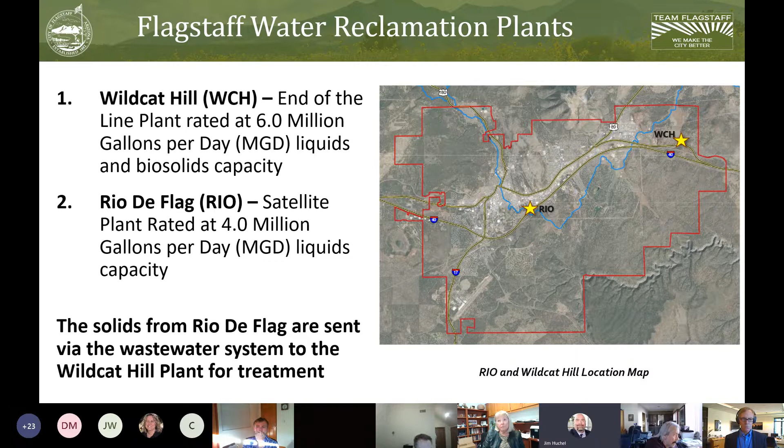And then Rio de Flag is a satellite plant. It's rated for 4 million gallons per day, and we're putting through right around 2 million gallons today. The important thing to remember from this slide is that the solids from Rio de Flag are sent out to the Wildcat Reclamation Plant for treatment. So since 2010, we've been working on all sorts of energy efficiency projects between the solar fields, VFDs, variable frequency drives, and motors.

We're going to give you a little bit of history. So Wildcat Hill was constructed back in 1971. It was constructed at 3 MGD, or 3 million gallons per day. It produced a Class B reclaimed water that was delivered to Continental Country Club. Biosolids started to be disposed on site. In 1981, they expanded the facility to 6 MGD. There have been no expansions since 1981, so we're still rated at that 6 MGD.

In 1993, they constructed the Rio de Flag Water Reclamation Plant. And again, it came in as a 4 MGD facility, currently running at 2, but it put out a Class A reclaimed water. And the difference is the amount of nitrogen that we take out of the water, basically just for the reclaim purposes. In 2009, Wildcat Hill was upgraded to a Class A reclaimed water plant. Again, no capacity increase, just increased the treatment capabilities of it to a Class A.

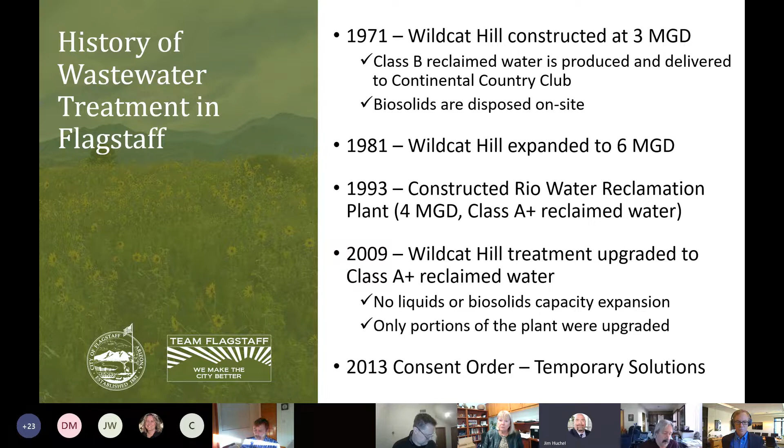There were no liquids or biosolids capacity expansions, and only portions of that plant were upgraded. And again, we're going to talk about some of those things that weren't upgraded. In 2013, there was a consent order, and we put in a bunch of temporary solutions. The temporary solutions were supposed to be good for 5 years. They're still being used today. So it's almost 10 years later, 9 to be exact, that we're still using some of these temporary solutions.

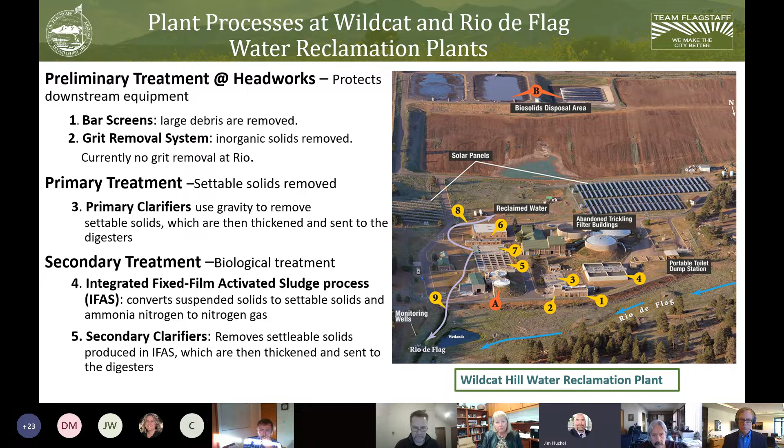The next stage is called the tertiary step, and those are the sand filters. That's down here in this number 6 area. We run through the sand filters or disc filters. Again, we're taking out particulate matter that is larger than 10 microns.

From there, we go over to disinfection. The big difference between Wildcat and Rio is Wildcat uses chlorine, where Rio uses ultraviolet disinfection. And again, what we're doing is just trying to make the water safe before we put it out. From there, the fully treated water goes into either the reclaimed water distribution system or purple pipe, or it's discharged into the Rio de Flag drainage.

We have 2 anaerobic digesters down here marked by the A, and that's where all the solids go. So we keep those solids in there for about 15 days. It digests the solids, just like in your body, you digest the food. We break down those foods into their most common particulates, which is carbon, which is the biosolids. We release the water. We also get a byproduct of methane gas from doing this process.

From here, the digested solids are either sent up to the 2 ponds. We call these sludge storage basins, or over here to the geobags. The geobags were one of those temporary things that were put in about 9 years ago as a temporary solution for the ponds.

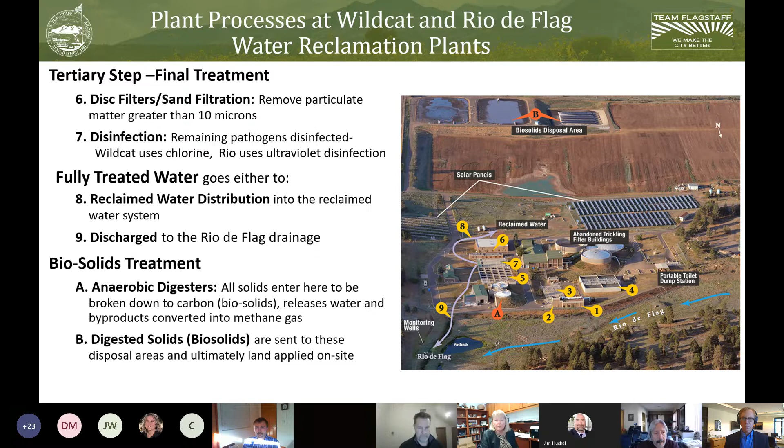And what all this does for us is redundancy, because we have multiple points, especially at Wildcat, for single points of failure or a potential failure. And it limits our operation and mechanical flexibility, meaning that we can't take things offline in order to fix them because we don't have a spare one to put online. As you saw, that one IFAS basin is the only treatment process out at Wildcat. So if it goes down, then the treatment process out there will not work.

So what we're asking for the money for is for rehabilitation and replacement. Over the past 10 years or so, we've had budget constraints and the lack of redundancy to make the repairs. And why all this is important is because during peak flow events, during monsoon seasons, we can see 3 times the daily flows. So our current flows are right around 3.5 at Wildcat.

And so during monsoon rains, we can see those flows go up to 10 to 15 million gallons per day, which makes it really hard for us to do treatment because we need that detention time, the lag time in the plant, and actually to treat the solids.

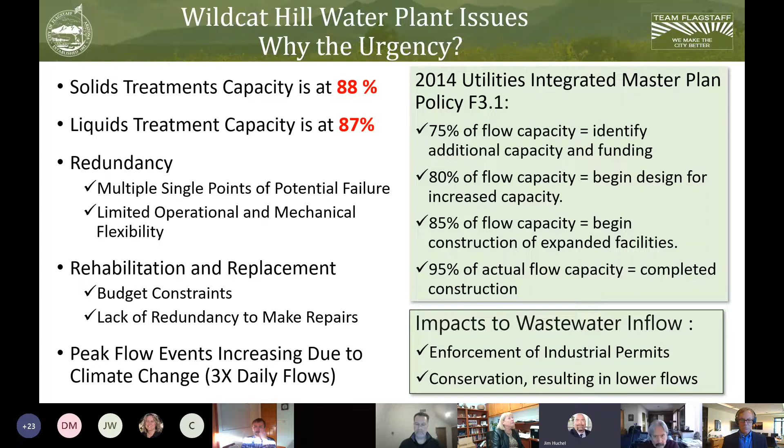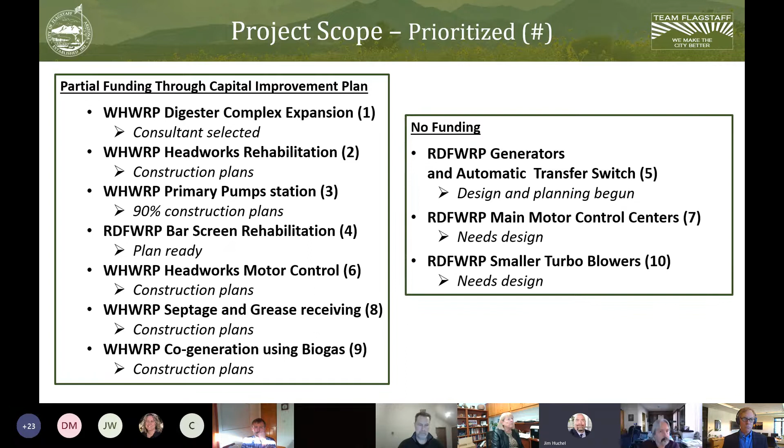So now we're back into the projects. This time we prioritized them for you so that you could see which ones were high on our list. And we're going to go through them in order so that we keep on track. So the first one is for the digester complex expansion. It's our priority number one. They were installed in 1983, and the mixing system was upgraded in 2008. The solids treatment capacity at the digesters is 88%.

We're really high on those, and we have to have that minimum of 15 days in the digesters, or else we will not be able to make Class B biosolids. If we can't make Class B biosolids, then we have to take it out to a landfill. So that's why this is so critical for our operation. And it's part of a three-part plan.

The first part is to build the digesters. The second part is to put in a unit to dewater. And then there's a third portion, which is going to be solar drying. So we're going to be very energy efficient on that one, where we can dry the solids and still apply them to the field. But it also gives us the opportunity to use it for biochar or use it for top cover out at the landfill.

Oops, sorry. And the project is estimated at about 16 million. The annual inflation rate is 20%. We kind of talked about that last week, where I've talked to some of my colleagues in both consulting and vendors, and they're seeing a 20% increase on all projects currently. And the risk for this one is very high. If we don't get this done, then we won't be able to treat the solids at the plant, which is going to cost us more money in the long run.

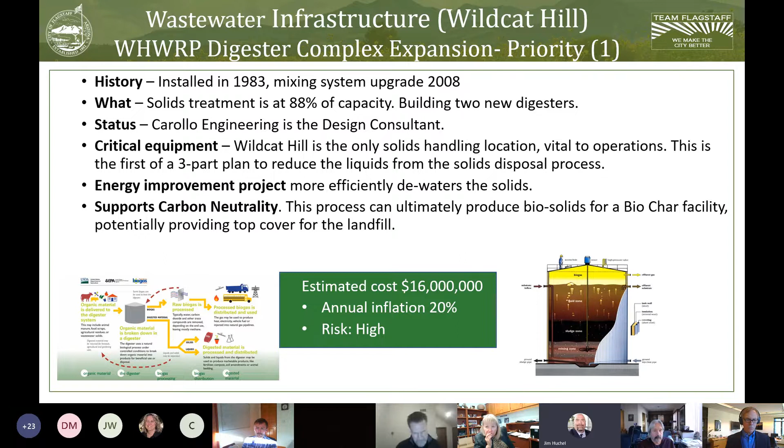The second project is the Headworks Rehabilitation. Again, Headworks was constructed in 1983. And whenever we put that in, we put in 3 bar screens. In 2012, we replaced 2 of the bar screens, but we didn't replace the third one. We're also going to install some flow metering for inflow monitoring. Currently, the flow metering system that's there was put in a manhole, and it's a temporary thing, and we're having a whole lot of problems trying to get a consistent flow.

And that's really important for us to know how much flow is coming in, because that's how we do our process control. Think about it as like your speedometer on your car. If it's not working, it's kind of difficult to tell how fast you're going down the highway. We're also going to put in a bypass around this building while we're doing the work in the building, which ties into the primary effluent pump station project, which we're going to do next. And what it does is it allows us to do both of those projects and be as efficient as we possibly can. So this will improve plant operations.

Currently, that third bar screen is offline. It doesn't work anymore. Again, it's almost 30 years old. It has lived its life. This also creates resiliency in the plants to help treat higher flows, get more accurate flow measurements. And the estimated cost for this project is right around $5 million. And again, that annual inflation is never going to change. It's always going to be 20%, but the risk is very high.

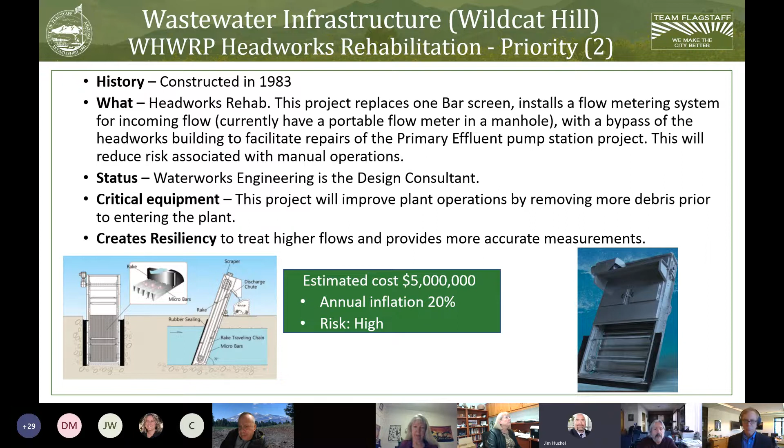So this is the primary effluent pump station. It's our priority number 3, and it has to be done after we do that other project. And what we did here is we gave you a schematic. You can see at the bottom down here, we have 2 smaller pumps. Whenever they upgraded the plant back in 2008, they did not do anything with the existing pump station. So our pump curve is very inefficient.

The pumps either have to pump too hard or not hard enough, and they're cycling on and off, which causes problems in the plant. This project puts in 2 smaller pumps for normal flows, and then these 4 larger pumps for larger flows. These 2 smaller pumps can also be increased in size in the future whenever the flows deem that to upgrade them to a higher flow.

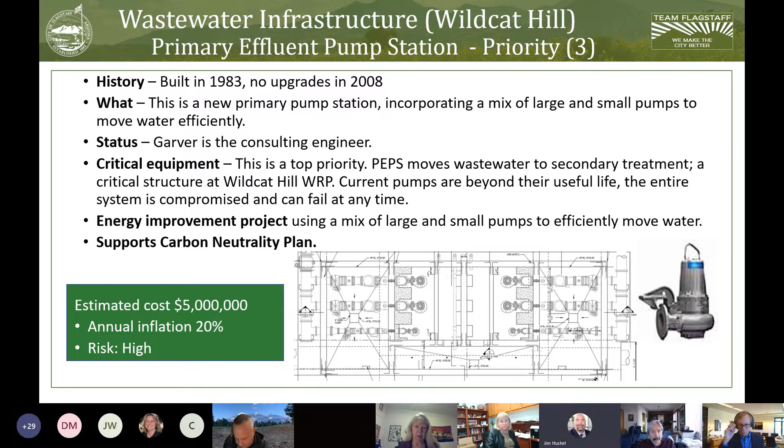This project is right around $5 million, and it's a high priority because during high flow events, the current pumping station runs all 4 pumps. If one of those pumps happens to fail, the flow will start to back up into the plant, and it can flood our tunnels and come up around the plant. This project also supports our carbon neutrality plan because these pumps will be much more efficient.

Our next project is at the Rio de Flag. It's a bar screen project, just like over at Wildcat, except these bar screens have been maintained very well over the last 30 years. We had the manufacturer come out right before COVID and inspect them, and they said that if we can get in there and make some improvements, we don't have to pull these bar screens all the way out of the system and put in new ones, which is a big cost savings for us. This is critical because we're planning on increasing the flows to the Rio facility, and for that, we have to have both of these bar screens online. So this supports our resiliency and redundancy initiatives.

This project is $1.5 million, and the risk is very high because, again, they're 30 years old. They're at the end of their useful life until we can get them fixed.

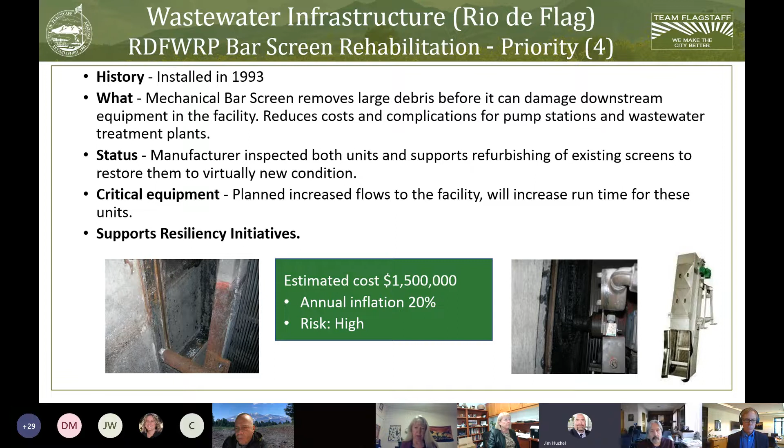The next project, again, is over here at the Rio de Flag. It's our priority 5 — the generators and switch gears. The reason for having those here is as we start to increase flow to Rio, the Wildcat plant will see a reduction in flow. And if, for whatever reason, we had a power failure and all the flow suddenly got sent out to Wildcat, Wildcat can't handle it. I kind of compare it to driving the Titanic — we can see the iceberg coming, but we just can't turn. So it's really important to have these new generators and switch gears in place before something bad happens.

We talked about this a little bit last time — we've lost power at the Rio before for 6 or 7 hours. If we go much longer than that, our bugs will start to die, and then it takes us 3 to 6 weeks to bring that plant back online. During that time, we have to send all that flow out to Wildcat, and it puts a big burden on them. The facility uses oxygen produced by compressors, which have to run off electricity, and the whole plant runs off electricity. If we don't have power, I can't even pump the water into the plant. So again, this supports our resiliency.

As we think about this — I was working at a plant 10 or 15 years ago, and they built a brand new plant for $33 million. They did not put in generators. 2 weeks after they put it online, the power failed, and the next day the engineers were out trying to figure out how to put in generators. The estimated cost for this project is $2.16 million. But the risk is a little bit more on the medium side, not the high side, because power failures are rare, but they do happen.

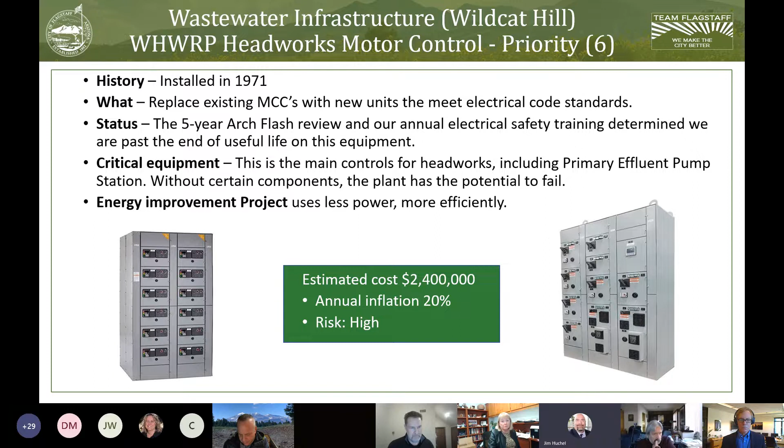So the next one is, again, a motor control center, only this one is over at Rio. Rio's is right around 30 years old, so it's time for us to start thinking about replacing it. Again, we want to bring them up to electrical code, and we want to make sure we have redundancy and resiliency. It was brought up during our arc flash study that they're nearing the end of their useful life. All of our MCCs are critical. We can't afford to lose one, because if we lose certain parts of the plant, then we can't effectively treat the wastewater. That's why it's important for us to have these projects done.

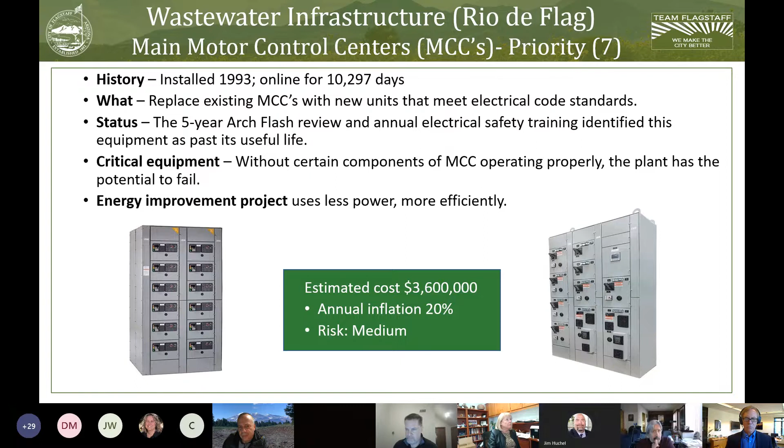The next one is out at Wildcat, and it's a septage and grease receiving station. It's a priority 8, and the risk is medium on this one.

The existing septage receiving station was installed in the mid-2000s, and the septage part is there for county residents. The grease station has no pre-treatment on it, so they can dump in whatever they want. This project is going to help us stop people from dumping things they shouldn't dump into the sewers. The grease is only accepted within a 20-mile radius, whereas septage is countywide. And as we all know, we're the second largest county in the country, so that's a lot of septage that comes into the facility.

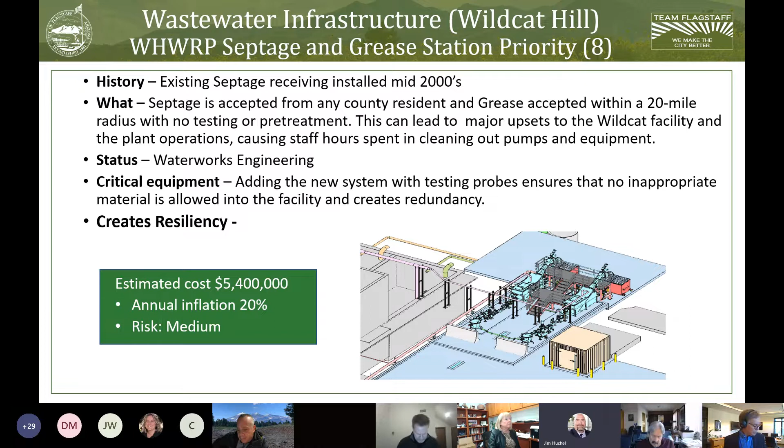The issues we've had in the past are people bringing in things that are not compatible with wastewater treatment, which causes major upset at the Wildcat facility and causes the operation staff hours spent cleaning out pumps and equipment, cleaning up foam, because somebody dumped something they shouldn't have. Right now we have no control over that. It's critical that we add this system, because we're going to add new probes into it. If somebody dumps something they're not supposed to, it'll go into a spare pit, which they'll have to pull out and clean, while it shuts down the system and purges it out so we don't hurt our existing equipment. Again, this creates resiliency. This project is about $5.4 million, and the risk is medium.

So this is project number 9, out at Wildcat. I talked about the digester gas, or methane gas, that we produce, which is basically just natural gas. That's what this project is for. What we're going to do is put in Cogen units, combined heat and power, so we'll get both electricity and heat for the buildings and for the digesters from these units.

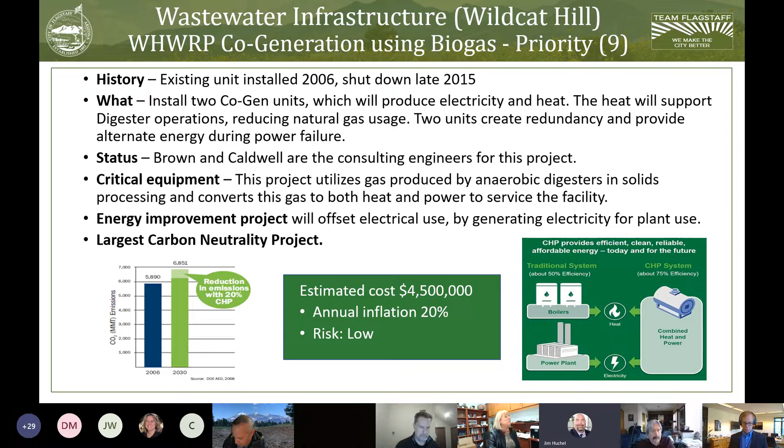The heat will help support digester operations and reduce our natural gas usage. The two units will help create redundancy and provide alternative fuel during emergency power outages. The project uses the biogas, methane, or natural gas, however you want to look at it, that we naturally create in the anaerobic digester. This is an energy improvement project, because it offsets our electrical use and natural gas use by generating electricity and heat for the plant. It's our largest carbon neutrality project so far. The project costs about $4.5 million, but the risk is low, because if we don't do it, we just continue on as we are.

And project number 10: over here at the Rio de Flag, we want to install some small turbo blowers. Back in 2017, whenever we installed the other blowers, they were just replaced in kind, and so the larger air blowers put out too much air.

So it makes it hard for us to run the plant, because our dissolved oxygen to feed our bugs, we try to keep it around 2 milligrams per liter, and it's up around 9 and 10 at night. It negatively impacts the biological system and creates problems within the system.

This project was identified through modeling. We use a modeling program called BioWin, and just through plant operations and in the 2019 master plan. This project would help balance the operation of this facility.

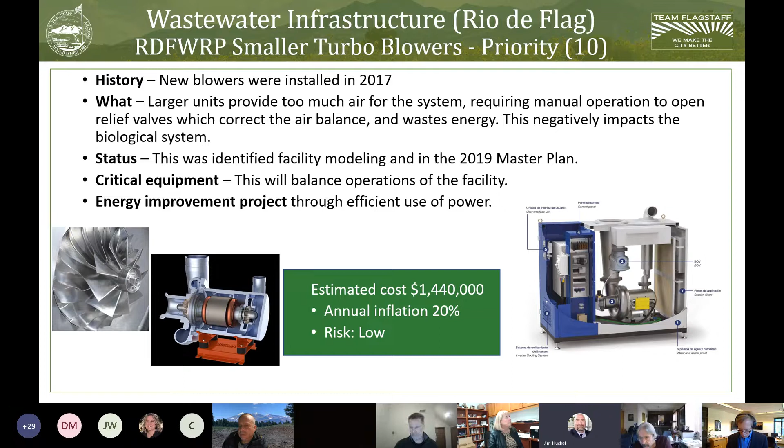And again, these blowers are much more efficient than the ones we currently have, so we would see a reduction in power. The estimated cost for this is about $1.44 million, but the risk is low because we already have the new blowers, but it would be very helpful for the staff to have.

So project benefits and community impacts. These projects were designed to help maintain current standards and technology. This is not an increase, it's not a decrease. It's just to maintain the current standards using newer technology.

They reduce the risk, as I talked about with the bar screens, and increase safety for staff and the facility. They maintain compliance with both ADEQ and US EPA regulations. They create redundancy, resiliency, and energy improvements. A lot of these projects were mentioned in the master plan, and they also create operational improvements to make it easier for the operators to run the facility.

Hey Jim, this is Gary. Can I interject something real quick? Sure, can you go back one slide? I most definitely can. Thank you. So I just wanted to hit on one thing - by the way, my name's Gary Miller, I'm the new Water Services Engineering Section Director.

When Jim's talking about maintaining compliance with ADEQ and other regulations, that particular bullet point is in relationship to our treatment of biosolids, and some of the other projects listed. One of the things I wanted to point out is because we treat so much more biosolids than the plant was originally designed for, we're really getting limited on that capacity. And as Jim had alluded to previously, we need to have the necessary equipment to treat the additional biosolids that we're seeing in our processes now because of conservation and because of just general growth within the city.

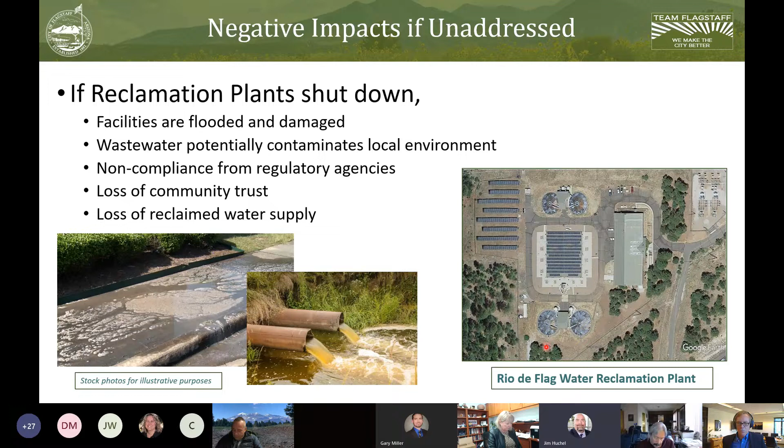So we want to continue to meet council's goals and objectives. So from the PBB, we want to ensure the safety and health of the community, sustainable and innovative infrastructure, and high performing governance. From the regional plan, we're looking at environmental and conservation goals, energy efficiency goals, and again, environmental and conservation goals. I know that's in there twice, and also to help support water resources.